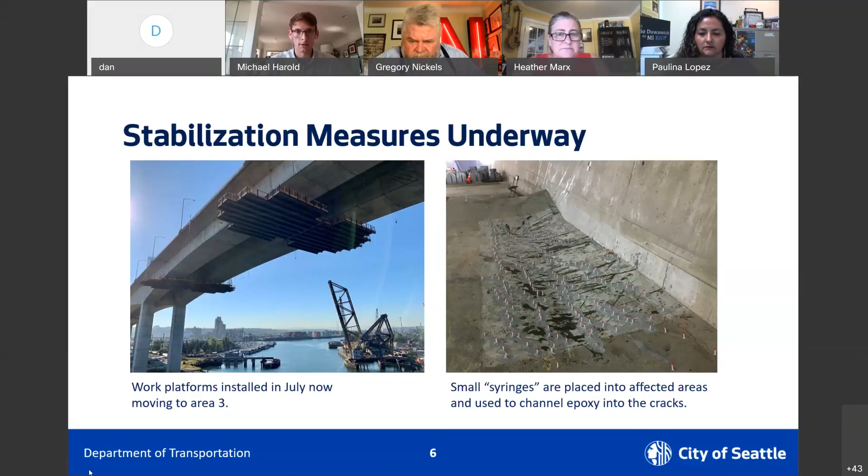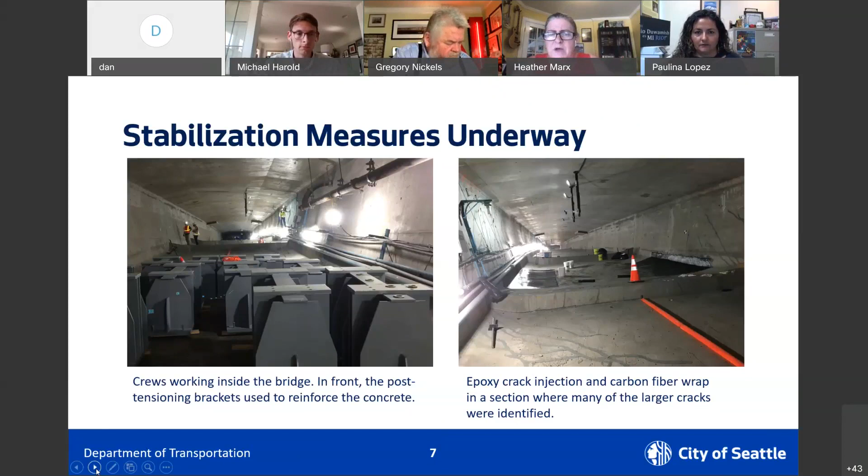Next slide, please. Incidentally, someone asked me how often they work - they're on the job 6 days a week. The crews get 1 day off, but they're working on all of that 6 days a week.

So the next thing I want to talk about is the low bridge access policy. If you are like me, you feel like we talk about the low bridge access policy a lot, and there are a couple of reasons for that. The first is that the low bridge has gained outsized importance in our system. The second is a lot of people want or need to use the low bridge in order to do their daily work. Next slide, please.

While there are lots of people who feel really strongly about the low bridge, there are also folks on this panel who maybe are not as engaged with that. In the world we're in, we're going to have to make a number of adjustments going forward to manage that low bridge access, including automated enforcement, which is coming up really quickly.

ILWU workers aren't going to need regular access now because the Matson operation has moved down to Tacoma for the time being. Van pool requests are increasing. Employer shuttle proposals are under development, though they are not using the low bridge right now. Prior to enforcement, we have a recommendation to allow all the essential van pools without placards. We would like to take a phased approach to automated enforcement where we continue to rely on human police to supplement the automated enforcement.

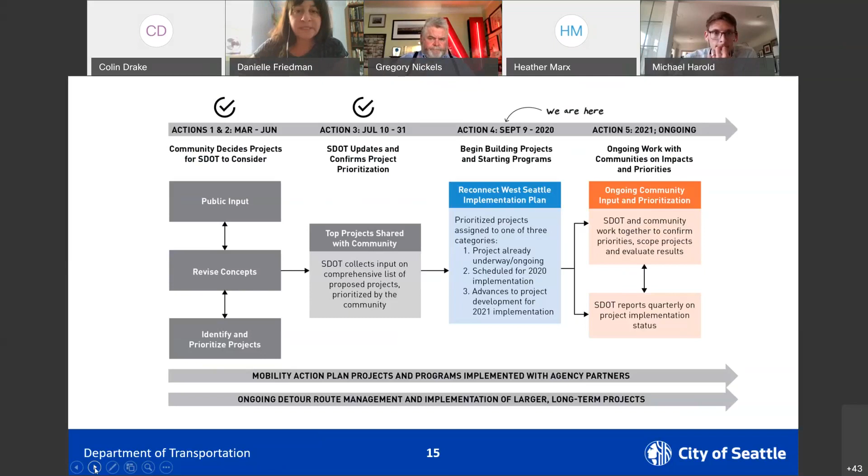For next steps, we're going to continue doing outreach to the community. We're going to put out flyers about what we heard from the community, since that was requested—something on paper that we can hand out and translate into different languages. We're going to be meeting with community leaders and community groups to figure out the best way to continue this conversation and what will work best for them. We're going to work with them on the project implementations for 2020. The home zone programs will roll out and start developing projects for 2021. We plan to have quarterly check-ins and implementation progress reports on how Reconnect West Seattle is going overall, and monitoring and evaluation will continue.

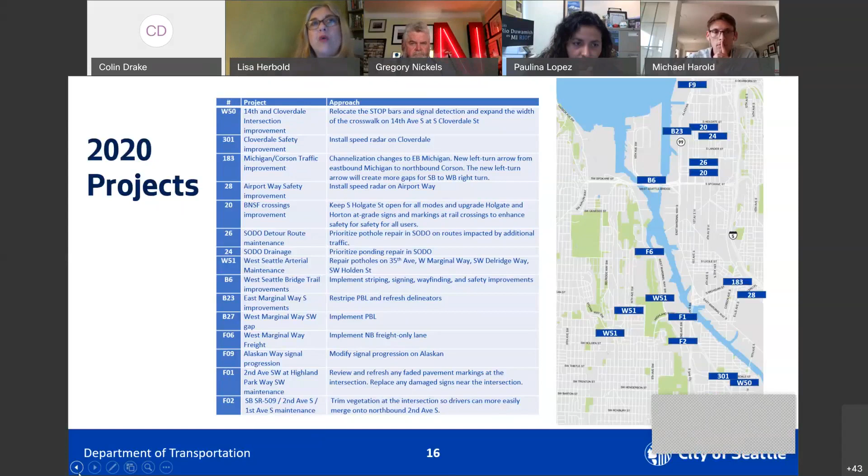They've made calls to the project number to find out whether messages are being received. That's a symptom of a broader request—not just knowing that feedback has been received, but the accountability piece of knowing we've heard you and included your input into the plans. I don't know how thoroughly we've created that feedback loop from survey results to the draft plan. Have we shown our work for the survey results and what the draft plans say? I think this becomes more important as we move to the next level of projects, and I agree we want to expedite that, but there isn't enough information yet to make commitments. I think it's important to create this communication and accountability feedback loop for those conversations as well.

Thank you for that comment. I agree, and I'm committed to working with community groups to set up something that will work for everybody.

Thank you, Councilmember Herbold. We are about 4 minutes beyond time, and I really don't want to take away from this CBA conversation. But Jolene, do you want to share your question very quickly?

Can you hear me? I can. It's a little echoey, but I can understand you. Can you guys hear me now?

Yes. So I've made mention at least 3 or 4 times about improvements to West Marginal Way, and was told that this group was not addressing anything on West Marginal Way, that West Marginal, East Marginal Way, and the First Avenue South Bridge and all that other stuff was being taken out and decided in some other forum that I never got privy to.

And now I see F6 is added there, to have a lane for freight, which I'm not sure is a good thing or a bad thing. But if you're going to add things to your little sketch here, why isn't the Duwamish Safe Streets project added so everyone knows what that's all about, since you're adding things to West Marginal Way here?

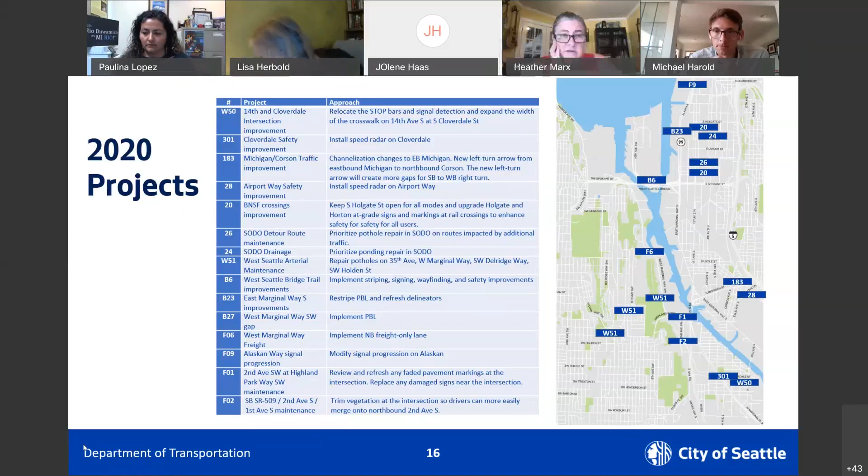Okay, maybe we can, yep, keep going. And maybe one more slide.

Thank you everyone for your thoughtful comments on the Reconnect West Seattle implementation plan. We are moving quickly and really appreciate your willingness to keep us accountable as we do so. Before I introduce Greg Banks, I want to note a little map we have here. In June we started the community task force to help ensure transparency, and I hope it's been serving that need for you.

In July, due to input from the task force as well as others, we added the immersed tube tunnel option to the cost benefit analysis. In August, by scoring your priorities for attributes along with the TAP, we've refined the tool.

Now you're going to have an opportunity to learn more about the cost benefit analysis and ask questions. By the end of this meeting, you should have a better understanding of how it's going to help us make that repair or replace decision, which we expect in October. At the next meeting on the 23rd, you'll have another peek behind the curtain and learn more about those results. Then in the fall, we'll have the final CBA report, which will help SDOT make a recommendation to the mayor and inform the mayor's decision about whether to repair or replace the bridge.

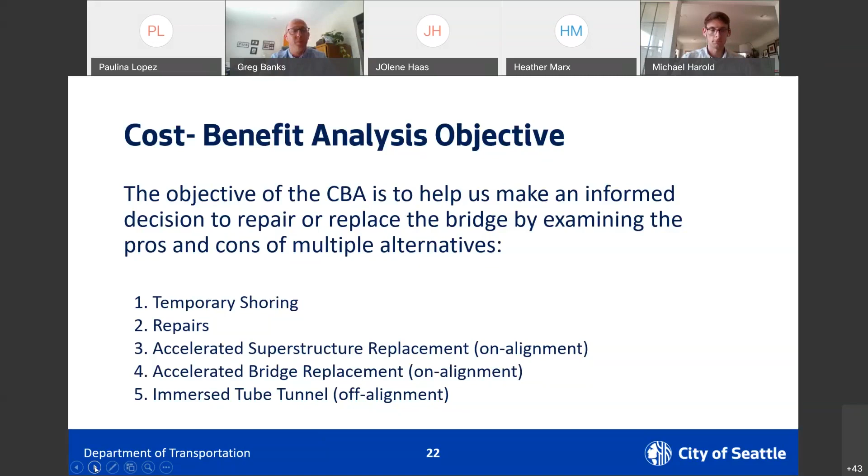By the end of the presentation, you should have a better understanding of how your feedback has helped shape the cost-benefit analysis and how the CBA process works, and how the CBA will help shape - not dictate - the repair replace decision. It's to help inform that process and give you an understanding of what the next steps for the CBA are.

From a schedule perspective, on the 23rd you'll be able to see how we've incorporated the risks and costs into the cost benefit analysis. In October, we'll see the preliminary results.

Based on the CTF feedback, we've advanced several immersed tube tunnel concepts, three in total - two to the north of the existing corridor alignment and one to the south of the existing alignment. One of the three will be included as alternative 5 in the cost benefit analysis. We're currently evaluating whether it's more technically and logistically feasible to put the tunnel to the south or to the north of the existing bridge.

We're taking into consideration traffic modifications, environmental impacts, cost, construction duration, constructability, but also impacts to private properties, the Port of Seattle, and the railroad as well.

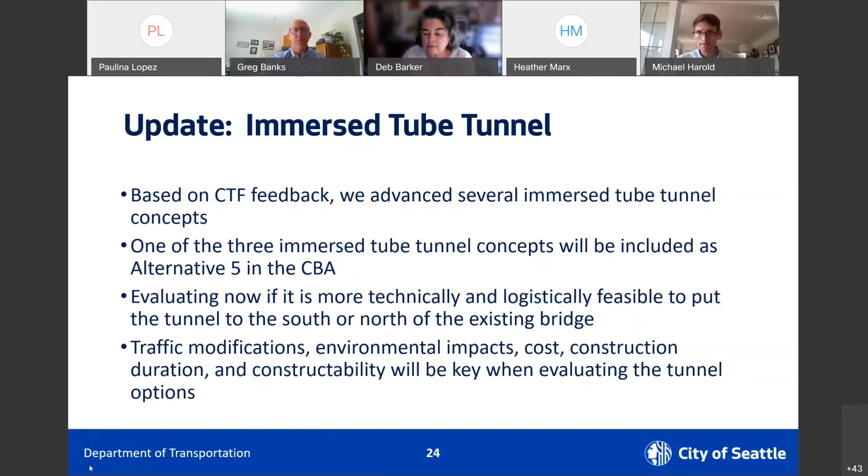We're asking ourselves a number of questions - where the tunnel components could be cast and how they can be delivered to the site, but also how the tunnel impacts Harbor Island and the maritime community, and how the dredging of the Duwamish disrupts the environment and exposes hazardous materials or impacts tribal fishing rights.

There are also private property impacts to consider, and how these alignments compare with Sound Transit's off-corridor alignments for the West Seattle to Ballard link extension and the EIS study they've done to date. All different considerations going into these alternatives - but this came on later, so it's a little bit behind, lagging the bridge alternatives we're looking at now.

Moving into the attribute weighting.

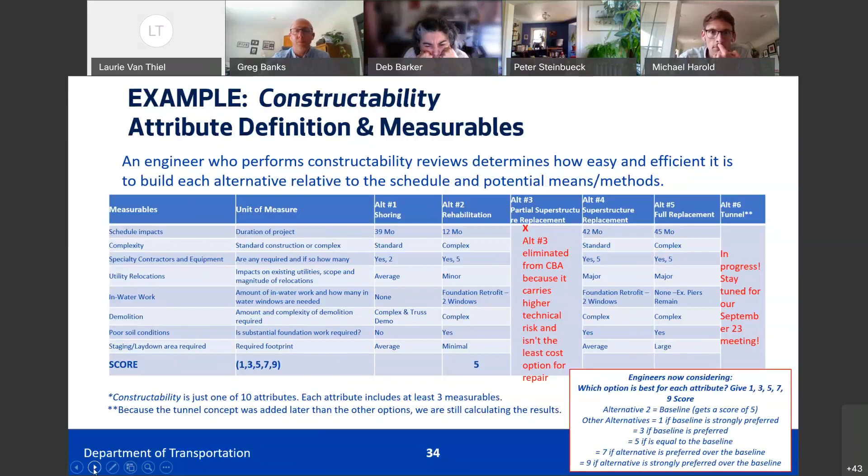So incorporating cost and monetizing risk.

So we're developing rough order of magnitude cost ranges, in part metrics based, but also in part on actual engineering calculations and calculated quantities. That's because of the varying level of the alternatives being looked at, the phase 2 or alternative 2 direct rehabilitation. There's been more engineering developed into that, so that's hard quantity-based calculations that support the cost development. But some of the replacement alternatives are in part quantity-based, but also in part based upon metrics from recent relevant experience.

Second bullet, there's limited estimates. The estimates are limited based upon the assumptions of the cost-benefit analysis. The underlying assumption is we're remaining on alignment and matching existing profiles, except for the tunnel, alternative 6, and it's the high rise only. So we're not looking at consideration of the approach or the approach cost. That stems from the lens at which the cost-benefit analysis was formulated, looking at accelerated replacement versus further investment in repairing the bridge. Capital costs are reported in 2021 dollars, and they're inclusive of design and construction costs, and also inclusive of contingencies and allowances.

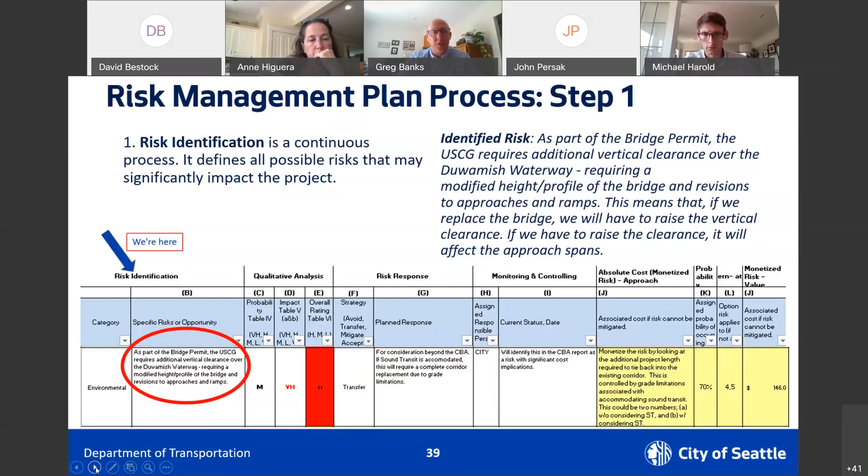Moving into risk management. As I mentioned, we have a risk registry. It just so happens the example I'm showing here is the one we just talked about. The risk process is multiple steps and continual - it's a living document. We have a series of slides to show you what that looks like, and we're going to focus on one of the identified risks: the Coast Guard requiring additional vertical clearance if a replacement bridge is selected as the path forward. Remember, the baseline assumption was that the replacement bridge was on alignment and matched the existing profile of the corridor.

After you identify the risk, the next step is to qualitatively assign a risk analysis on a very high, medium, low, very low scale. This considers the probability of that risk occurring or materializing, at column C, and also the impact of that risk on the same very high to very low basis. The product of those gives you an overall risk rating. In this case, the red shade means it's a high risk.

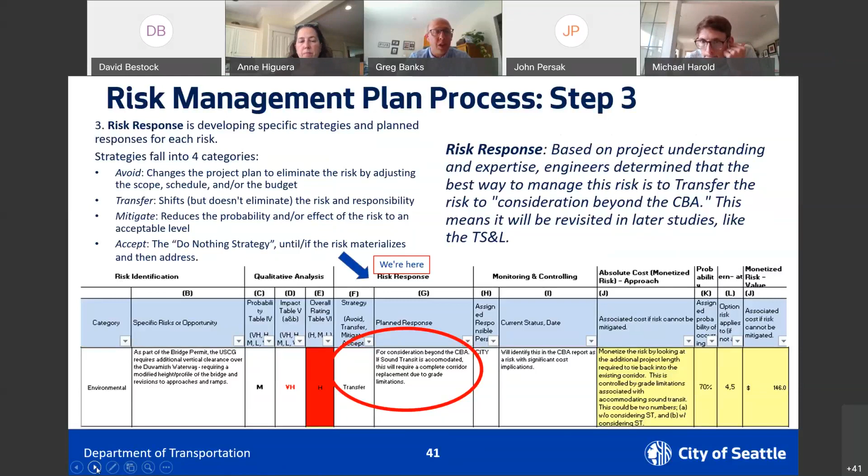The next step in the process is to develop a risk response. Do you avoid the risk - change the project plan to eliminate it by adjusting scope, schedule, and or budget? Do you transfer it, shifting but not eliminating the risk and responsibility? Do you mitigate it, reducing the probability and or effect to an acceptable level? Or do you accept it - a do-nothing strategy until the risk materializes and then address it? In this case, we're saying transfer it, so it's a consideration beyond the cost benefit analysis and will be looked at in further studies.

Then we identify the risk status and how we're monitoring and controlling it. For this risk item, we're transferring that risk, but it's going to include a significant cost consideration within the cost benefit analysis where we end our study. Future studies will look into that and potentially eliminate that risk, reduce the cost of the risk, or account for it in the cost.

I'm a little bit hung up on this labor question - I want to note that FTEs associated with construction jobs are included in the analysis, and we aren't assuming any big change in economic access with replacement versus repair. I appreciate the desire, and we can certainly add a full discussion of the impact that more time associated with a repair or replacement would have. But at this stage of the game, which is late, we're not going to add this as another attribute. So that's where we are on that one. Sorry, Greg.

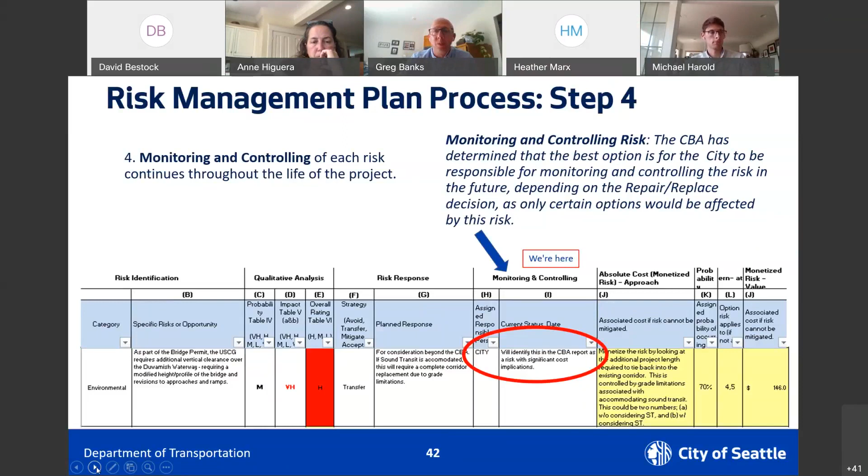The last step here in the risk registry includes a process for monetizing the risk, if applicable - not all risks can be monetized. As an example, we're monetizing the risk by accounting for the additional project extents going out into the approaches, as previously discussed. In this case, we need to account for a different impact depending on whether Sound Transit is included on the corridor, due to grade restrictions. The risk received a high risk factor, so we assigned a 70% probability factor of that risk occurring, and we have an absolute calculated cost impact for that additional length. There's a value shown here, but this is a living, breathing document that will be getting updated continuously. There's also a column for which alternatives the risk applies to - in this case, the replacement alternatives only, Alt 4 and 5, column L.

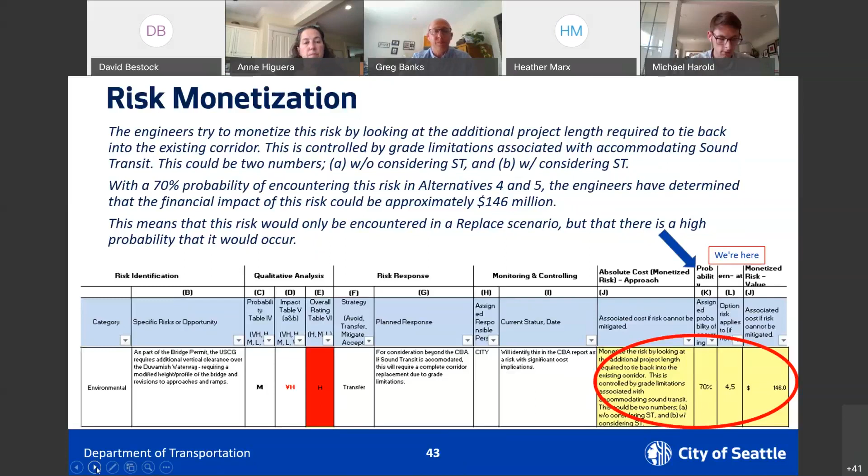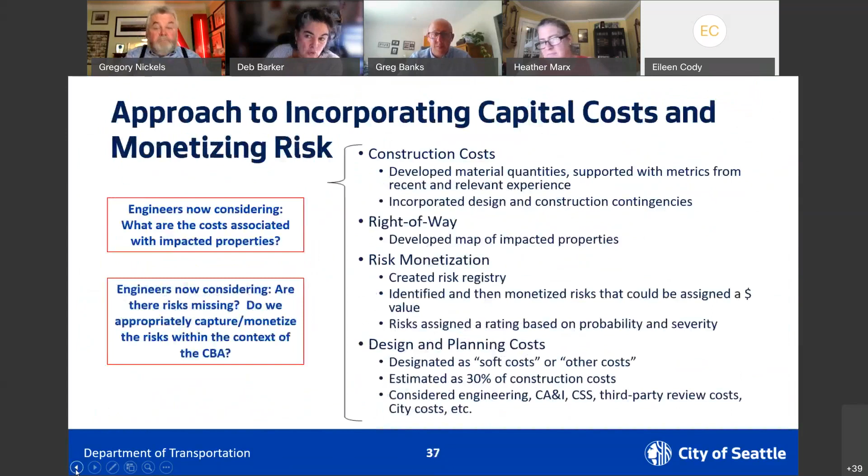I am looking at the Immersed Tube, the ITT north and south concepts, north and south of the bridge, and I just had a question about why. Are there actually supposed to be two tubes, one to fit under the Duwamish River and one to fit under the Duwamish waterway? Or how is the ITT dealing with the waterway? And that would be on the eastern side of Harbor Island.

Yeah, this is Greg. On the eastern side, there's the west channel and the east channel. On the east channel, you'd be elevated by the time you get there. In the profiles included on those slides, we have this green shaded area we call retained fill - you'd have to get elevated to a certain amount before you cross over the east channel. So the open cut areas are then coming into another bridge.

So there'd be ITT plus bridge for this potential solution, correct? Yeah, there's actually a lot - there's the ITT, you've got a cut and cover section, you have an open cut with walls, then the embankment, then to a bridge. Yep, you have retained fill.

Lastly, a question on this - when you have open cut or retained fill, since that's right of way, can you do anything in those areas, like build affordable housing, something like that? Affordable housing on Harbor Island? No, I'm looking at the open cuts or the retained fill areas, the cut and cover areas. What's to become of those areas should we have an ITT concept?

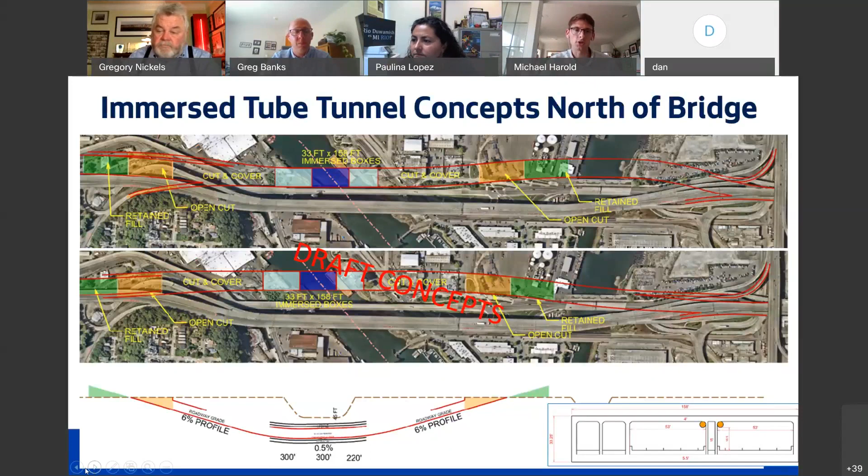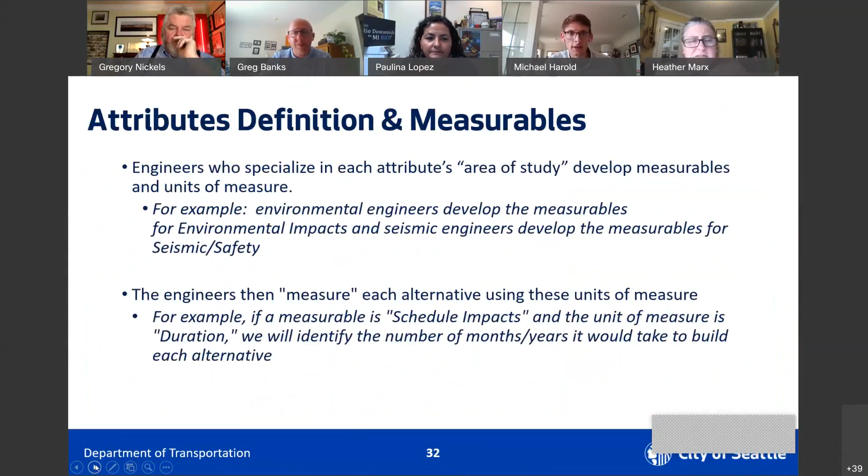It gets forward in the slide deck. Nope. Were you looking for the weightings? Yes, the weighting, that colorful slide, Meg. This is the next one. There you go. Yeah, nope - so environment. Yes, there we go, there we go.

So environmental is the third attribute down there from the top, and you can see the different entities - the city, the TAP, the CTF - in terms of how they weighted that relative to the other attributes. On a combined basis, it receives 8.5% of the total 100% score.

But in terms of the attribute itself, it's defined as a measure of the potential adverse effect to the built or natural environment, making consideration of noise and vibration impacts within the waterway, 4F resources, emissions, and wildlife impacts. Those are the measures being used to define the environmental attribute.

Commissioner Steinbrueck, I know you have to sign off soon, and I just want to make sure your hand is raised, and that we're not leaving a question hanging for you.

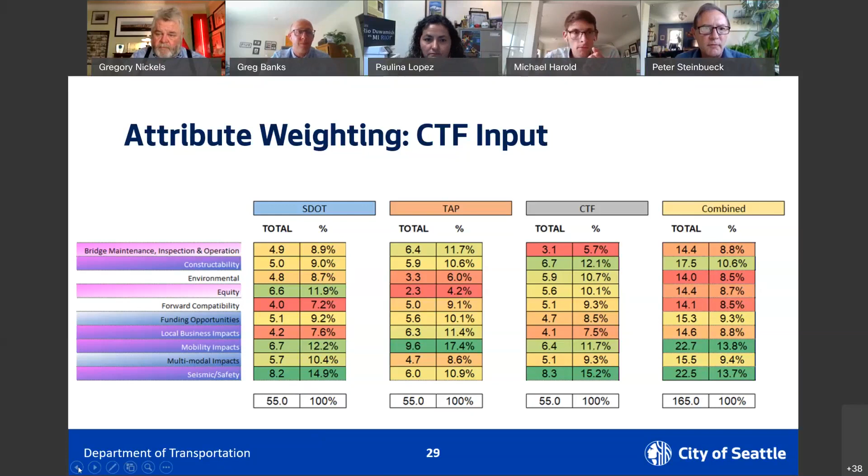Thanks, I just had one technical question related again to the Immersed Tunnel. Your diagram shows a 46 or 47 foot depth of navigable water, and I think we need more than that - closer to 56 or 57 feet, which would push the tunnel that much deeper. So I'm just curious where you arrived at that 46 foot figure.

Yeah, it's a function of what the dredge depth would be and having a clearance above that for the channel itself, and then beyond there, it's the grades and understanding how to get in and out of the channel there.

When you said the 56 feet, I'd be curious to compare notes on where you got that. That's why we're doing our dredging now with T5, and that is the number I've been told from the port that we need if there's to be alterations here, and the 46 foot depth would not be feasible. But we can follow up with staff on that. Yeah, if you could follow up on that, that'd be great. Sure. Like I say, we've been coordinating with the city for that number we have.

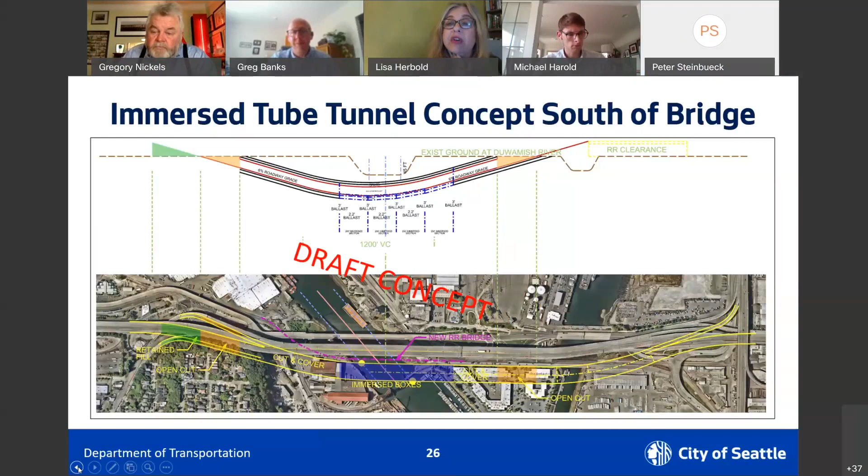Sam Zimbabwe: I don't have a question, I just wanted to jump in a little bit because I know we're going on 2 hours. We've got a little bit of time left, but I've been here listening the whole time and really appreciate everybody's questions, comments, feedback. Deb, you said earlier it's hard to ask a question that you feel might be stupid in front of 100 people. I think there's no such thing as a stupid question in this context, and it's really important for us to hear what's going through the task force's mind. This is a ton of really complex technical information, and we can get wrapped up in the technical aspect if we don't get good questions that push us to explain it to everybody.

I also just want to make sure people are clear on a couple of things. One is that the decision before us is repair versus replacement now, and the CBA and this process won't determine what replacement looks like if we are on that path. So we are not deciding today, or this fall, whether we are building a tunnel or a replacement bridge. We are deciding whether we are immediately going into replacement, or working on repair into replace. The other big piece is that this cost benefit analysis is part of the decision-making process. It's not a big machine that spits out an answer and we immediately do what the machine tells us. Things like the risk register and understanding the sensitivities and challenges are part of our explanation of the decision-making process we owe to everybody this fall, and the reason why we are recommending a certain direction on the bridge.